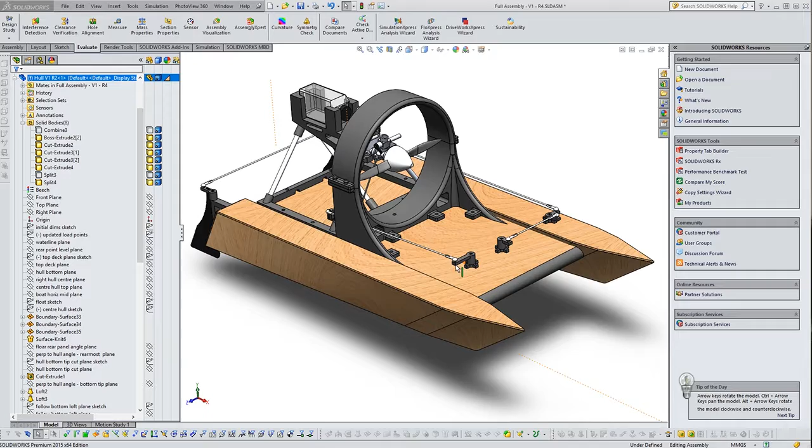So last time we did the rudders on the back here and a bit of linkage to a servo that's going to be underneath the deck here. And what I've done now is I've created the throttle.

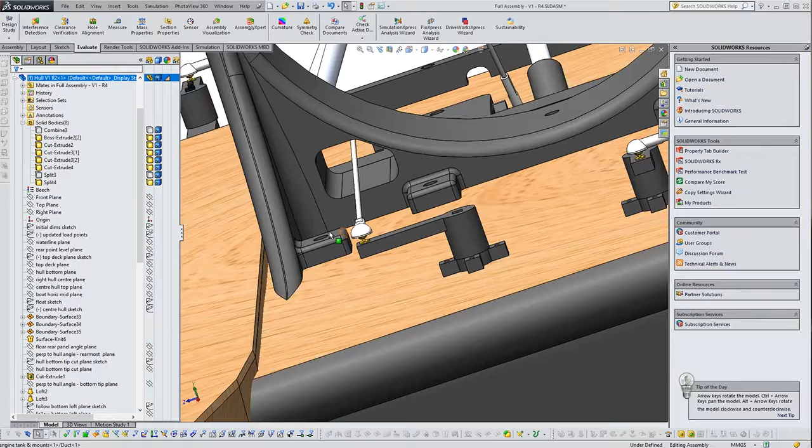So we've basically got another servo sitting under the deck here. It's got an arm coming out through exactly the same type of O-ring sealing type effort with a square key, and that sits on there. Linkage goes back through this rather handy hole here, which probably will be enlarged, but we'll get to that later.

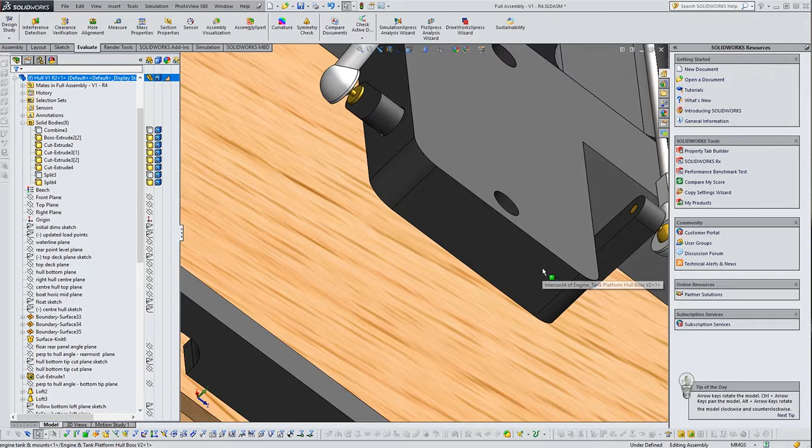And it goes to an arm here, so you can see this. I've extended the base plate here out. It's got a hole through it, which you can just about see there, and this arm goes through. It's got a sort of specific angle and length, which probably again will need adjusting, but we'll see how that works out to get the right sort of ratio of twist and all that kind of stuff.

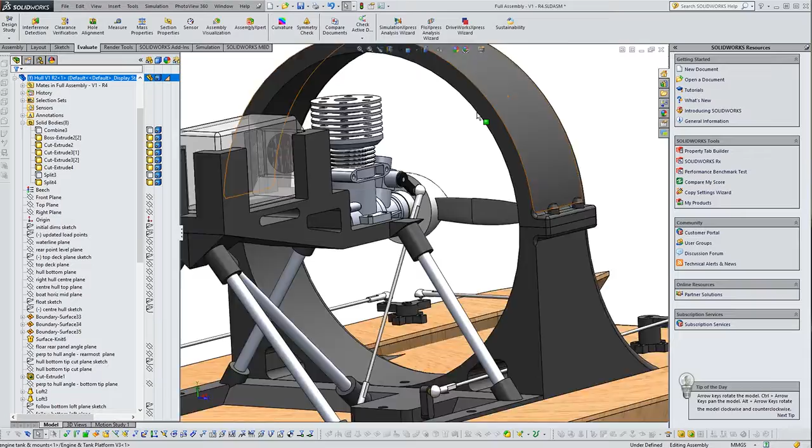So it comes out the other side, and another link arm goes up to the carburetor. Oh, it's not really zooming properly. Yeah, there we go. So then basically if the linkage moves somewhere, we'll just move it down at this pivot here, we'll pull it back.

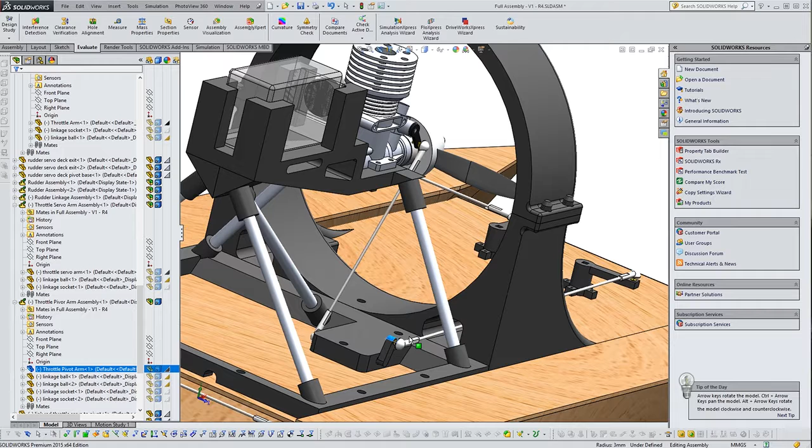You can see that, well, we can't quite see the servo. Let's get the servo in shot. So if we move this backwards and forwards, basically that's the servo at the front, moving around a bit, pulling that, pushing that, and opening the throttle.

So that kind of is the throttle done. And in fact, by and large, that really is the majority of the components for the boat there. When I say the majority, it's kind of all actually.

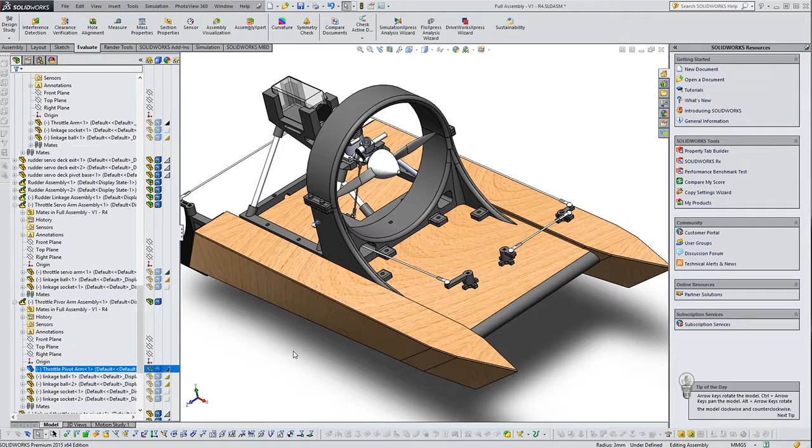So now I need to kind of translate this into a reality, because there are some things that need a lot more attention in order to make this viable.

For example, this duct is going to be 3D printed, maybe out of PLA or ABS, I'm not sure. But it's going to be really heavy at the moment. We need to sort of hollow this all out as much as possible, the same with this whole engine structure here.

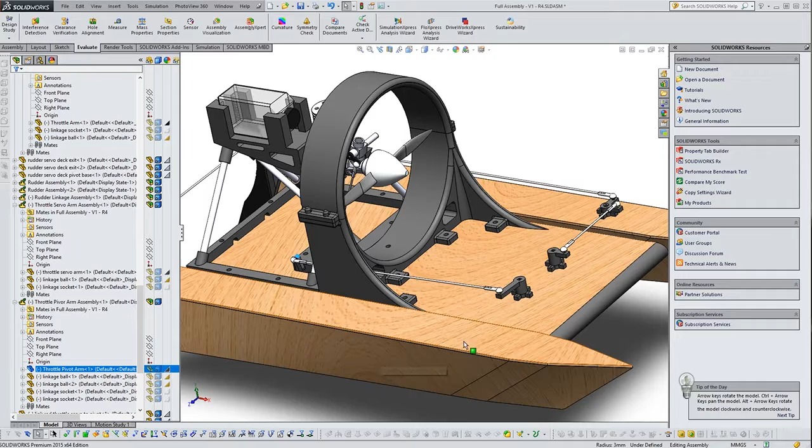And I want to build some structures. In theory, to begin with, right at the beginning, I had planned on just kind of gluing all of the plywood parts together, cutting them out and gluing them together. But although that's probably possible, I think it'll be a lot easier if I build myself some sort of guide, some little structures, as light as possible, 3D printed, just to go in the hole at various points, so we've got something to pin these little bits of plywood down to.

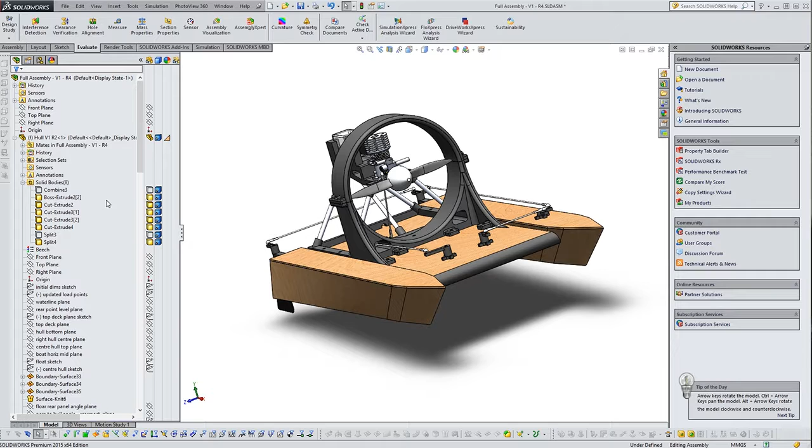And I have started with this work. Let's have a little look at this. Turn that on. We can't see anything yet. So if I turn that off, okay, let's turn off that nose as well.

Where are we? Nose. Okay, so the nose is just this little bit here. This is the rounded bit, which will, in some way that I haven't decided yet, adhere to the front here. If I turn it off, you'll see the reason why.

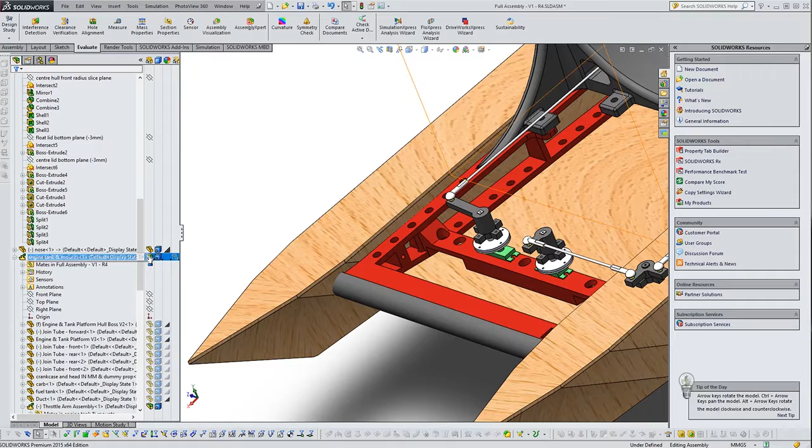So this is where the batteries for the radio controls will go, and it's sort of all part of the lower structure, as you may have seen before, or as I probably showed before. There was a structure at the front here that basically just held the servos.

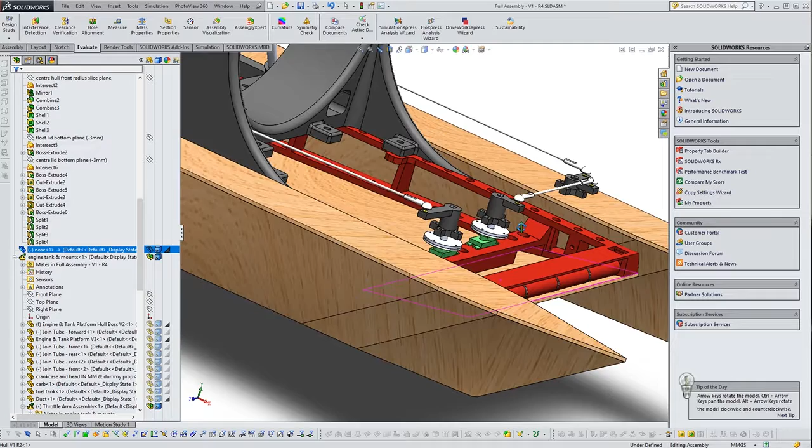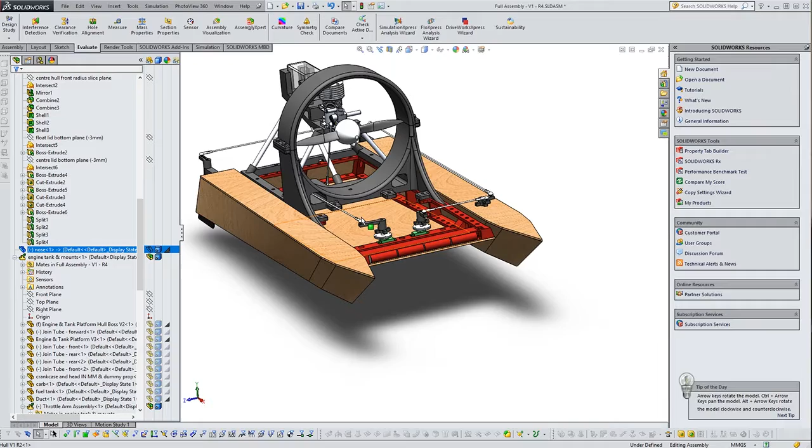It was a monstrous thing. I've now adapted and extended it so that it runs all the way down the side of the boat, providing a structure to bolt the floats to the center hull. It also gives us something to adhere and wrap the plywood of the bottom of the center hull and the top deck to, and allows us in certain places to screw down into this 3D printed part underneath the hull to give the whole thing strength.

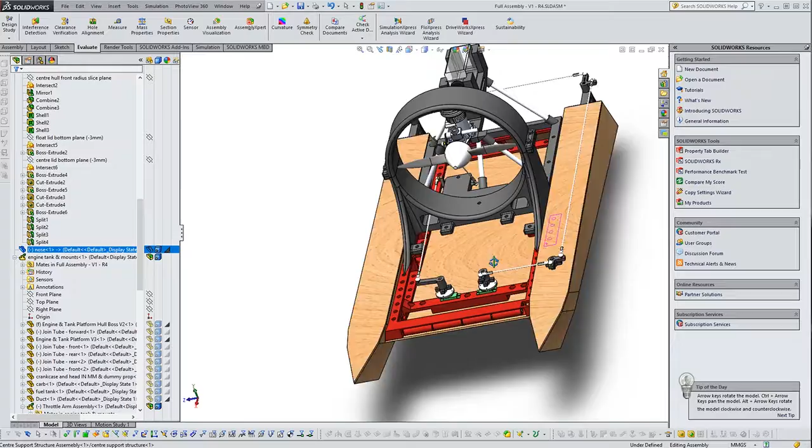So that's the case there. This engine support structure at the back here bolts down to it as well. That gives it all a little bit of strength and hopefully makes it easy to build. The downside is that it adds considerable weight.

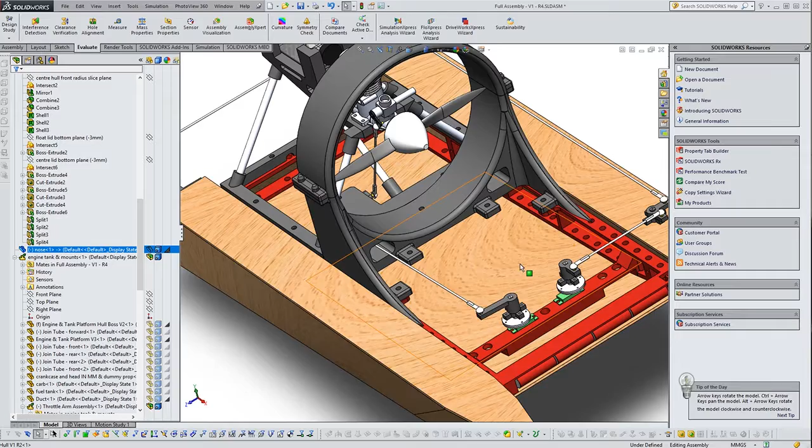Now I've cut out as much of this as I really want to. There's so little material there, I'm not sure whether it's really going to provide any strength, but at least it will provide a jig, if you like. It also still performs the function of holding the servos.

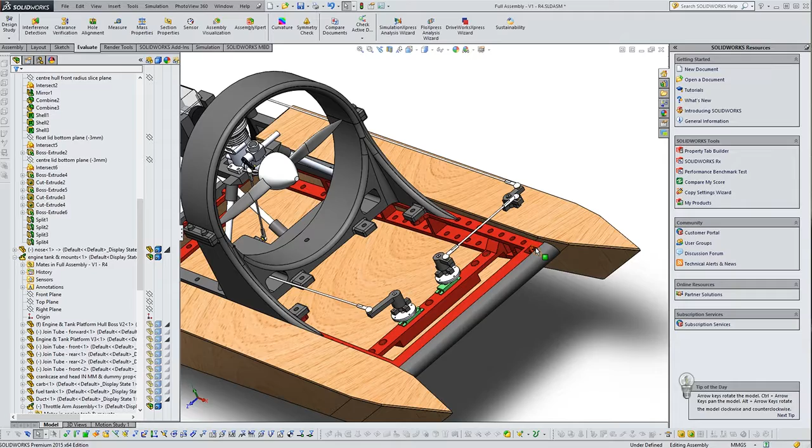It also performs the function of being a little battery box. So essentially at some point, and in some way yet to be defined, the little nose will screw or slot, or a combination of both, on the front just to hold the batteries in and provide the sort of rounded front.

Now this is red because this is now starting to be made out of the correct material. What I've done is I've made a simulation, the best that I can, of a 40% infill PLA density. So I've taken the density of PLA, added some solid perimeters, and come up with a density figure for around 40% with something like 3 to 4 layer perimeters.

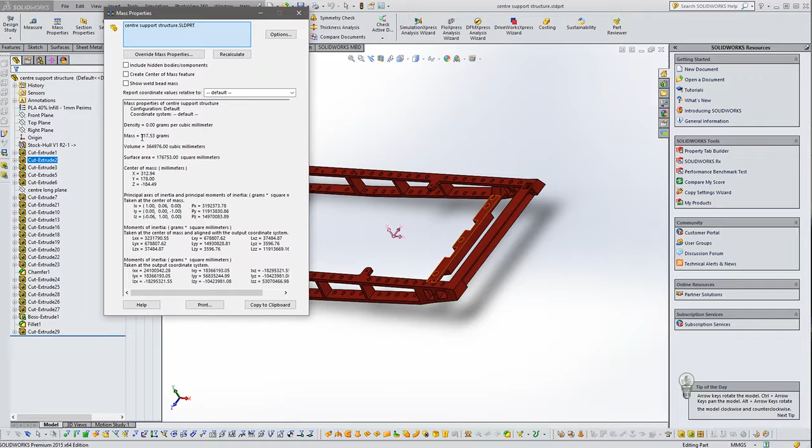If we open up this part by itself, we can see that if we go to evaluate mass properties, this is coming in at 317 grams all by itself, which is a considerable heft really on the boat, but it will save us a bit of plywood, so we'll grab something back there.

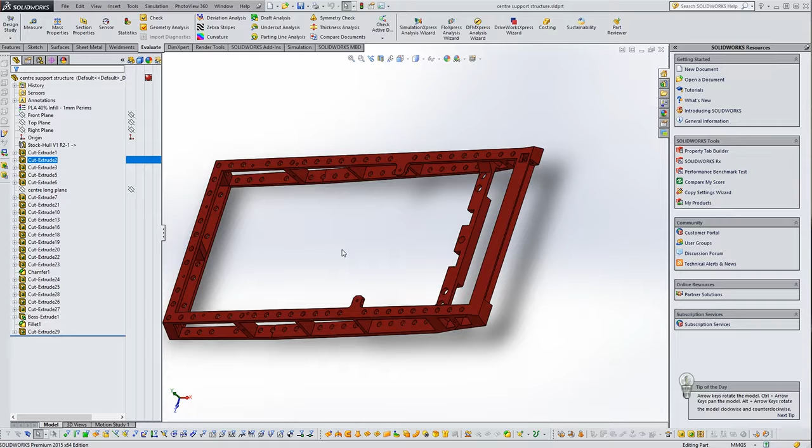And I think it's necessary, to be honest. That's just how it is. I think when we get to the end, you're going to have to recalculate all the weights and the buoyancy and all that kind of stuff. So if the hull needs to be extended slightly to give more lift or more buoyancy to support a bit of extra weight, then so be it.

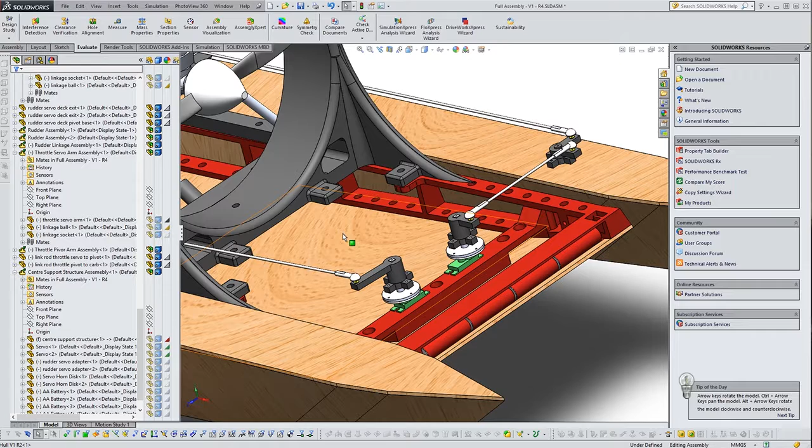So let's close that. There is one important thing missing from this design so far, and that is the radio receiver. The reason being is that the only spare radio receiver I have is what they call a park flyer thing, i.e. a low power limited range, which I think might be a bit sketchy. So I'm going to have to get myself another full range receiver, and until I do that I don't really know the dimensions of it.

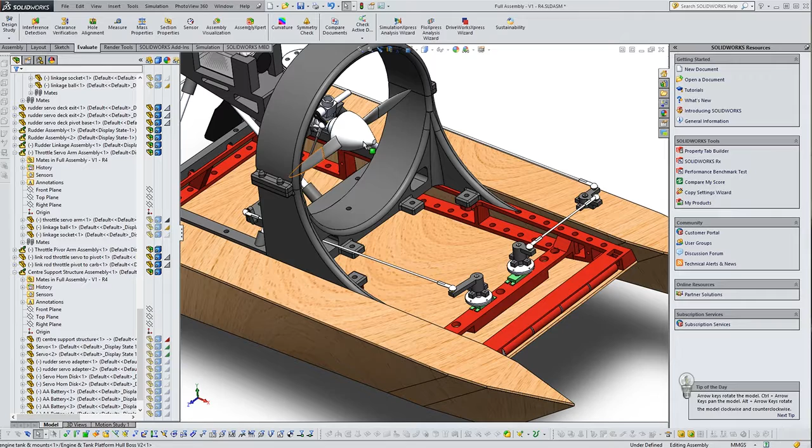So the next things that need to happen is I need to revisit the duct and convert it to red - if only it was that simple. Basically change it to my 40% infill PLA, get a weight of the thing, and start shaving away as much of it as I possibly can. I need to try and get it down to about 200 grams, which is what I estimated in my original guesstimations. Yeah, so that's the next thing to be done.